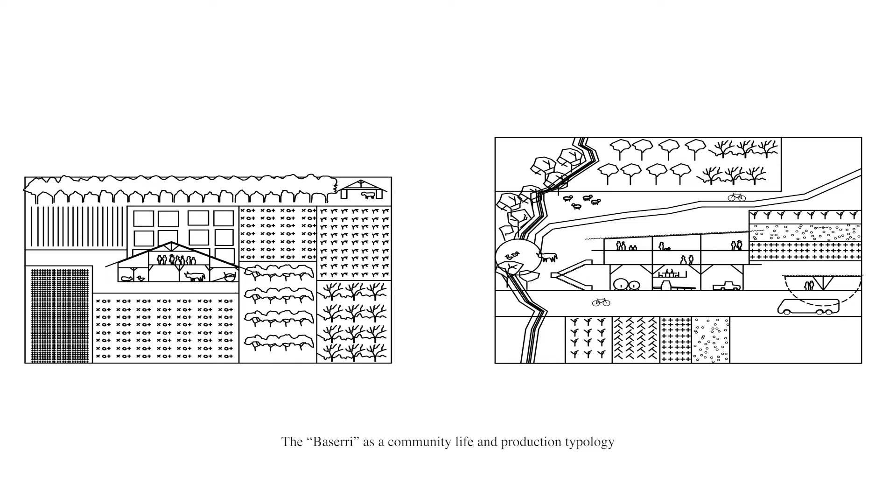Beizama is a territory of baserriak, small dots in the map interconnected with each other, generating a local economy by profiting from the natural environment. Baserri can be described as a community life and production typology that's strongly linked to nature.

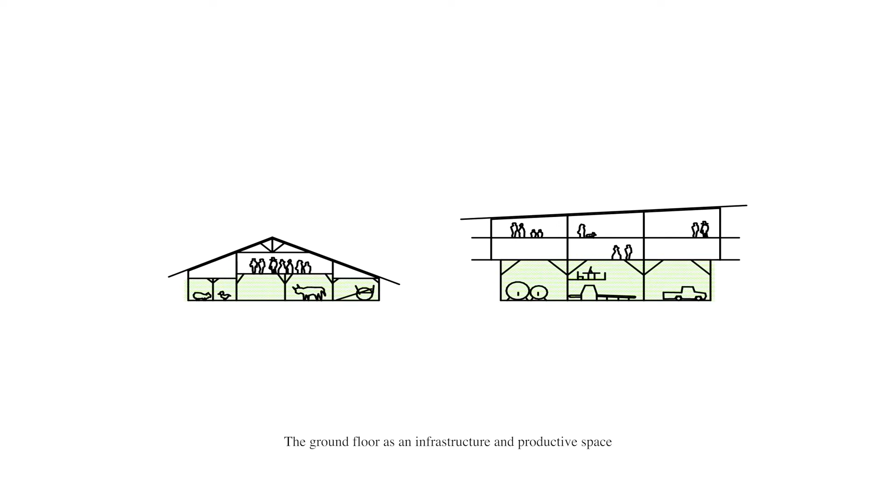The project proposes the update of this historical typology from a productive, architectural, domestic, and sustainable approach. We can easily learn from these historical constructions and propose new ways of living in relation to the natural environment. We want to avoid the romantic vision of the baserri as a country house. We therefore focus on the function of these historical buildings beyond its rural aesthetics.

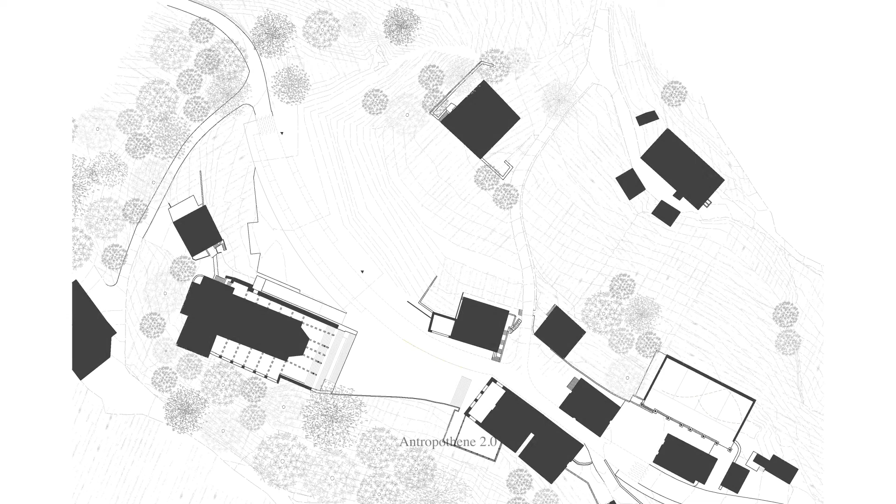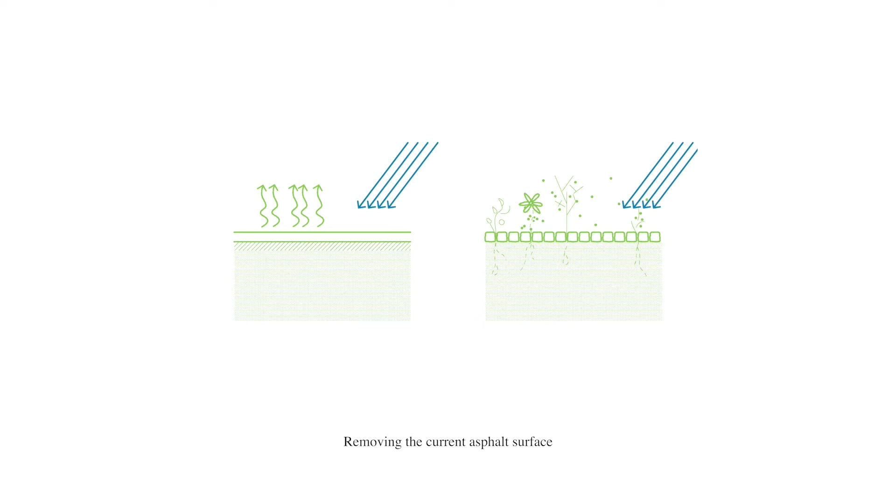Rhizoma tries to learn from the mistakes of the Anthropocene and creates a new deal between the local ecosystem and the comfort of its inhabitants. This new master plan for the town of Beizama proposes a system of urban strategies, such as removing the current asphalt surface, bringing the fauna closer to the inhabitants, and understanding the environment by managing and reusing local resources for construction or energy supply.

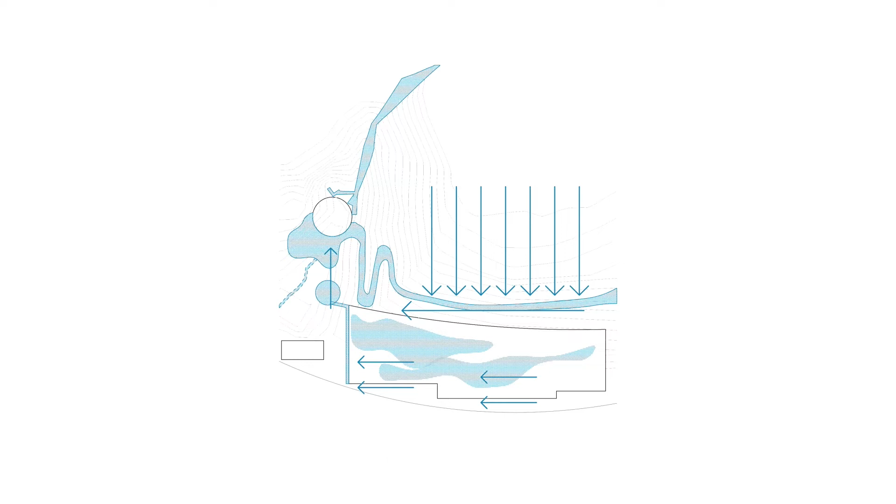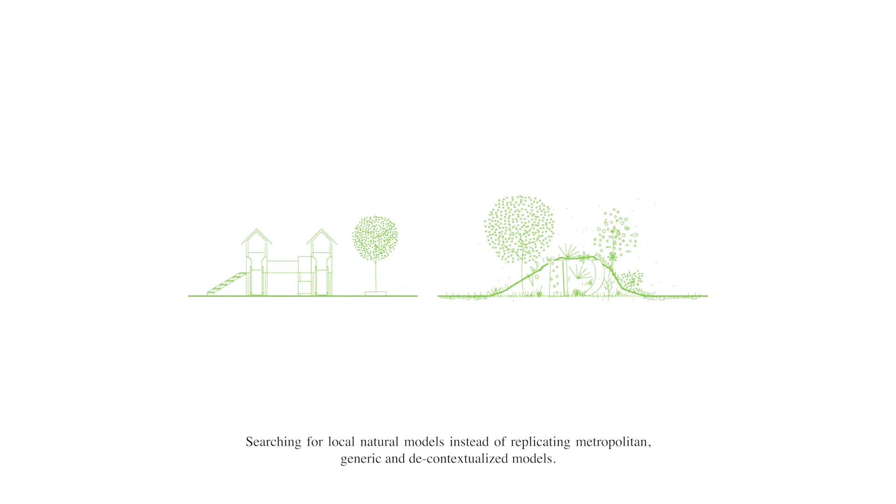We want to avoid the construction sprawl by optimizing the footprint of the new constructions in order to minimize the impact on the existing natural environment. The new construction utilizes historical construction methods, becoming sustainable not only through its shape, but also through its materiality and energy performance. The aim of these strategies is to utilize local natural models instead of replicating metropolitan, generic, and decontextualized models.

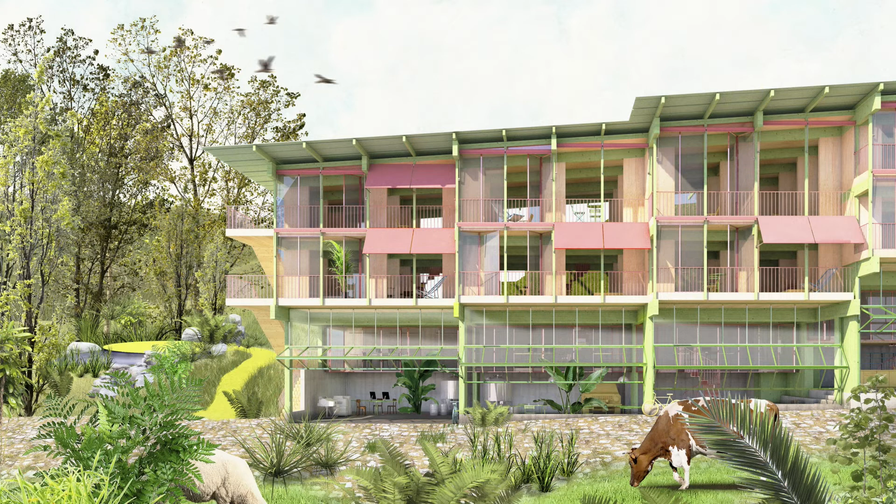This new topography helps bring the different existing urban spaces together with a new productive and public space, handing the ground floor to the town of Beizama. Thanks to the new car-sharing systems, as well as the enhancement of public transport, the traditional car parking spaces will be reduced, generating new flexible space in the plinth, which allows the inhabitants of Rhizoma to organize productive spaces in community or individually, and provides the town of Beizama with new public spaces.

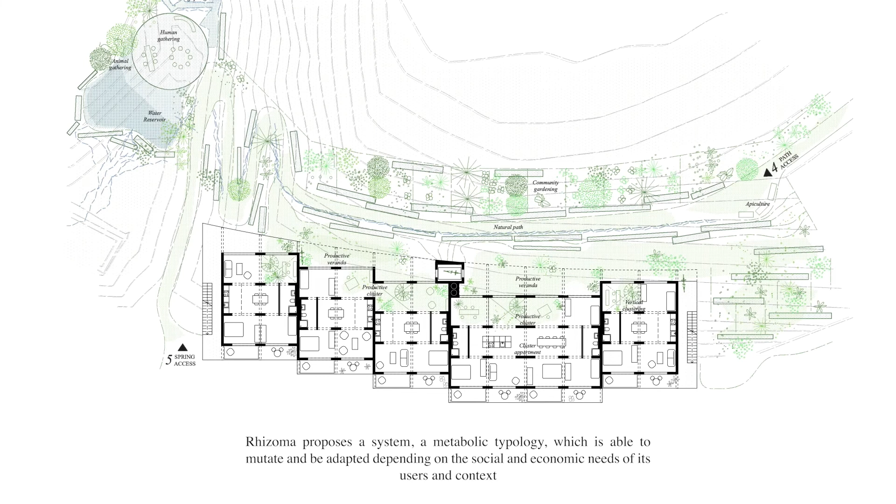Rhizoma proposes a system, a metabolic typology which is able to mutate and be adapted depending on the social and economic needs of its users and context. By offering a non-hierarchical system of 12 square meter units, Rhizoma generates flexible dwellings that allow for all kinds of family formations and relations between individuals.

As in the historical baserri, the kitchen becomes again the central space for interaction. At the same time, the productive spaces act as filters between public and private situations. This system enables the extension of these productive units both vertically and horizontally, creating a whole new matrix of relations, which enhances the communal feeling of the building.

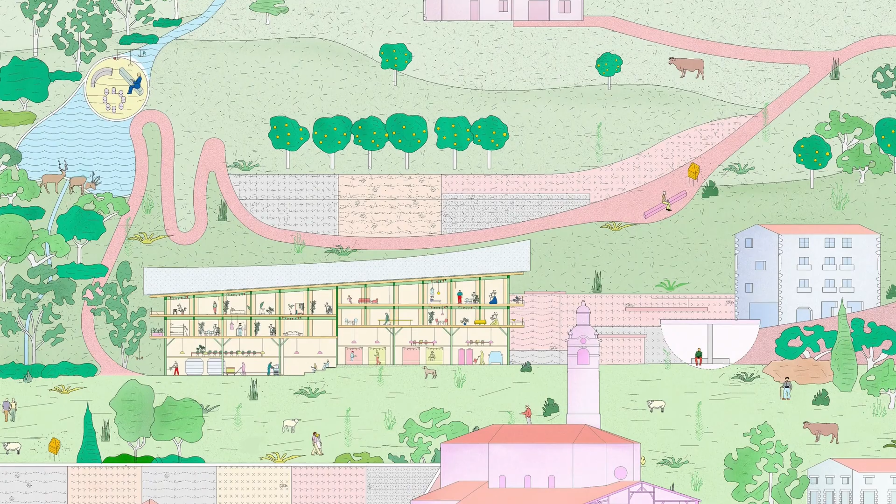Therefore, Rhizoma proposes a new community system for future ways of living. All in all, a metabolic proposal that establishes a new deal between the people, the fauna, and the flora of Beizama.